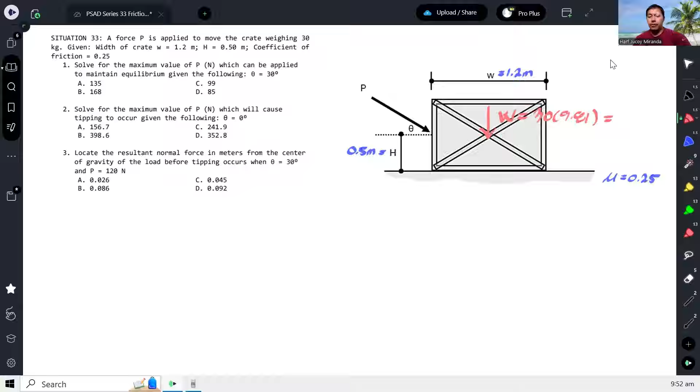Okay, let's draw the free body diagram here. Of course, there's the weight, which is equal to 30 kilograms times 9.81, and if you calculate that, it gives us 294.3 Newtons. The impending motion is expected when it slides to the right, that means the friction will act to the left. And then we have our normal force. That's it.

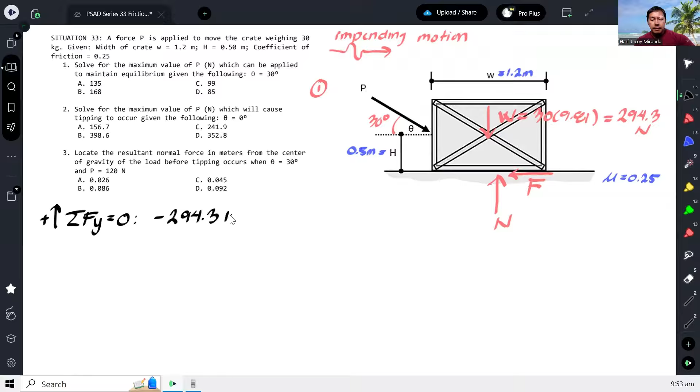For the first problem, number one, theta is 30 degrees, so we just need to find P. To solve for P, we apply the equilibrium equation: summation of forces Y equals 0, assuming upward positive. We have 294.3 Newtons downward plus the normal reaction upward, and this P has a Y component which is downward, so P sine of 30 degrees equals 0. From here, we can solve for N, which is P sine 30 plus 294.3.

Then we take summation of forces X, assuming to the right positive. We have the X component of P which is P cosine 30, and then we have the friction force, minus F, all equal to 0.

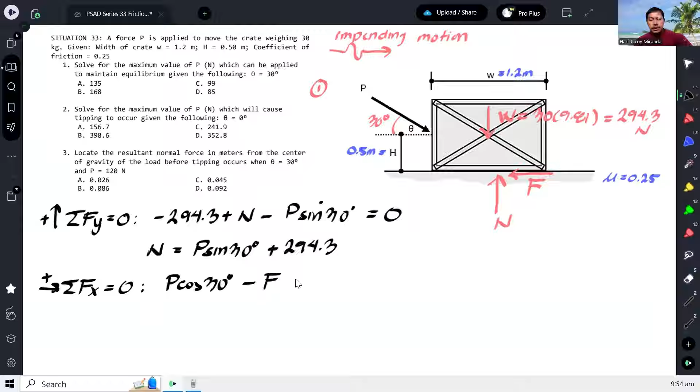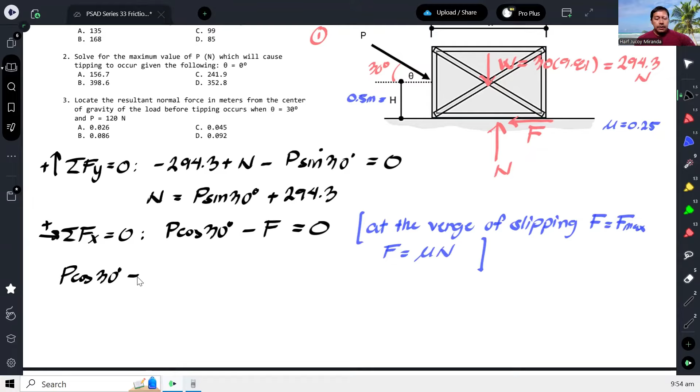Of course, at the verge of slipping, our friction force will equal the maximum friction force, which is mu times N. So we set that as mu times N. This means P cosine 30 minus mu, which is 0.25 times N, is equal to 0. However, N is equal to P sine 30 plus 294.3, so we can substitute that.

And from here, we can solve for P, which gives us around 99.3 Newtons. So this is now the maximum value of P to keep the crate from sliding. The reason it's about sliding is because summation of forces X equals 0 was our criteria. So that's the maximum value of P to keep the crate from sliding.

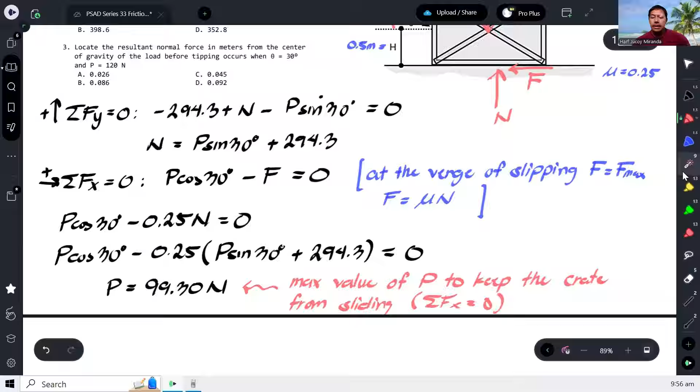Actually, in the problem statement, it only says to maintain equilibrium. It didn't specifically say to keep it from sliding, meaning to avoid sliding. So when it's equilibrium with this setup, it's not only sliding that can happen as instability - there's also a tendency that when you push it, it can topple, it can overturn. So the criteria for overturning or tipping, summation of moment should equal 0.

But summation of moment about where? As you can see, when it topples, our pivot will be at this point, so this is now our point of rotation. Let's call that point O. So summation of moment at point O must be 0, and let's see what the maximum value of P would be to avoid tipping.

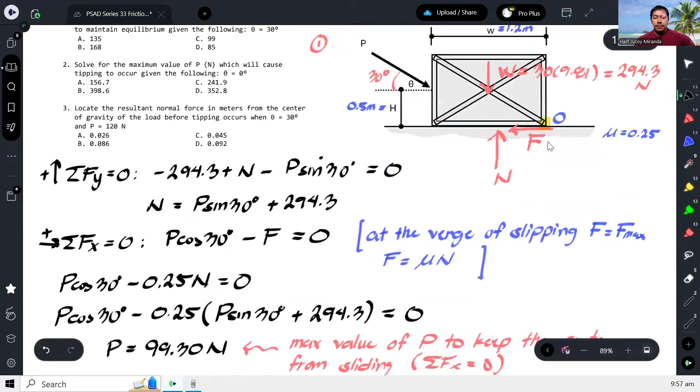So let's take moment about O. This has a horizontal component, P cosine theta, assuming counterclockwise is positive. The moment arm of P cosine theta about O is 0.5, and its rotation about O for the horizontal component will be clockwise, so negative.

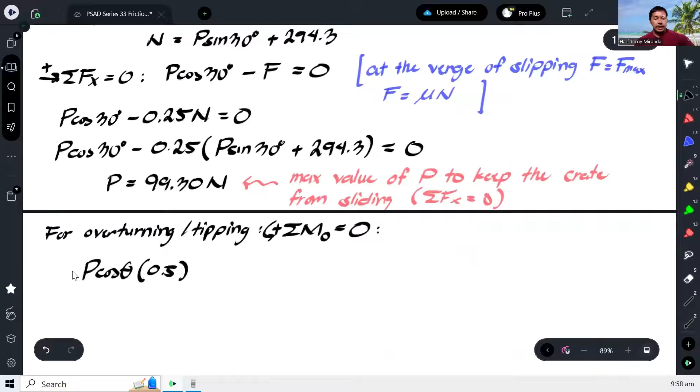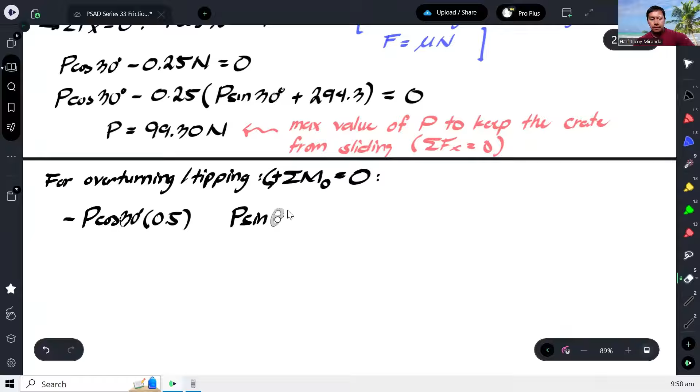The vertical component, which is downward, is P sine theta - and theta for this item is 30 degrees, so let me add that in. The moment arm for this is 1.2, and its rotation would be counterclockwise, so positive.

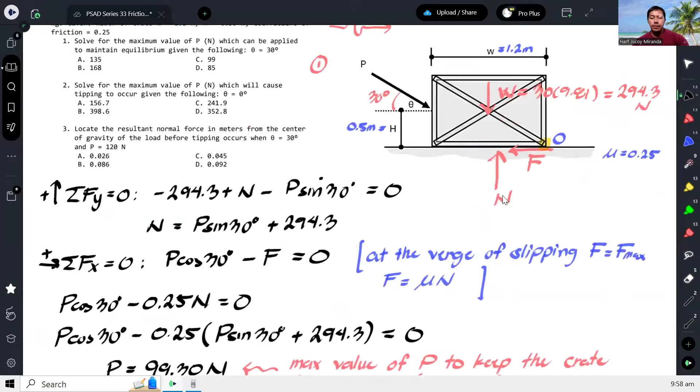Then there's W, which is downward, and its rotation is also counterclockwise, so plus W, which is 294.3. Since W should act on the centroid of the box or crate, its moment arm should be half of 1.2, or 0.6. Now, what about the normal force and the frictional force?

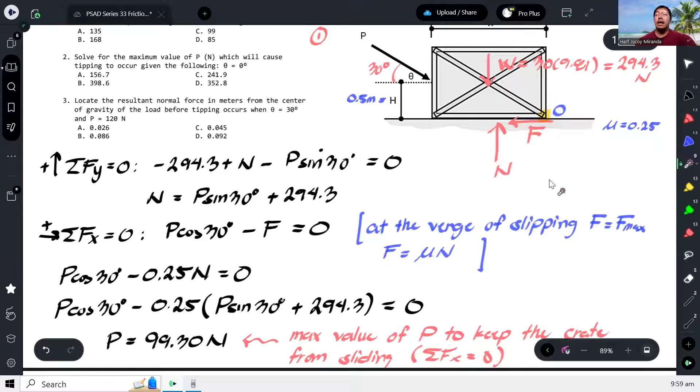Yung frictional force, dadaan naman siya dun sa mismong point O, kaya wala na tong moment. For normal force, baka ang maging misconception niya dito is yung normal force nag-act dun sa centroid. Hindi, no? Kapag friction, hindi naman necessarily na yung N ay nag-act dun sa centroid. Actually, itong N na to pwedeng mag-move depending on the scenario. For our scenario, we are considering that it is at the verge of tipping.

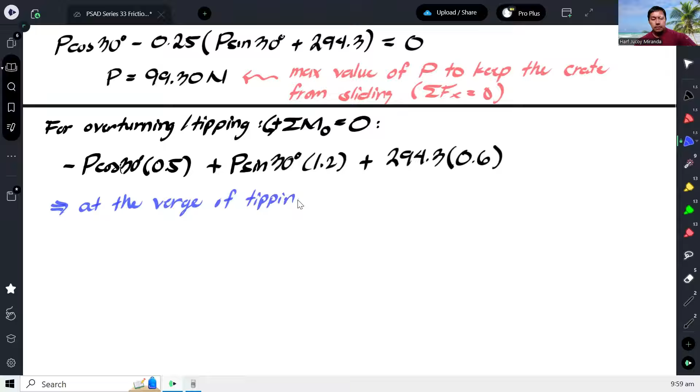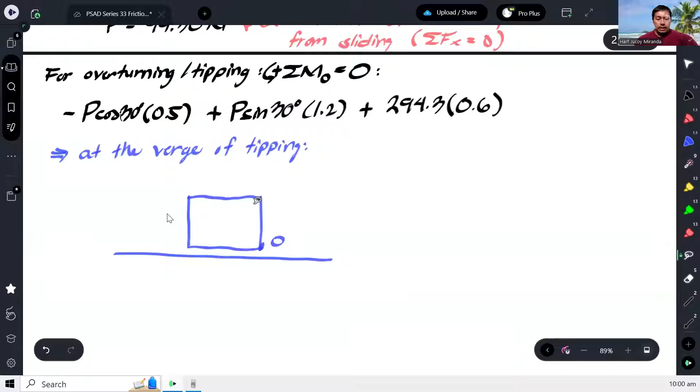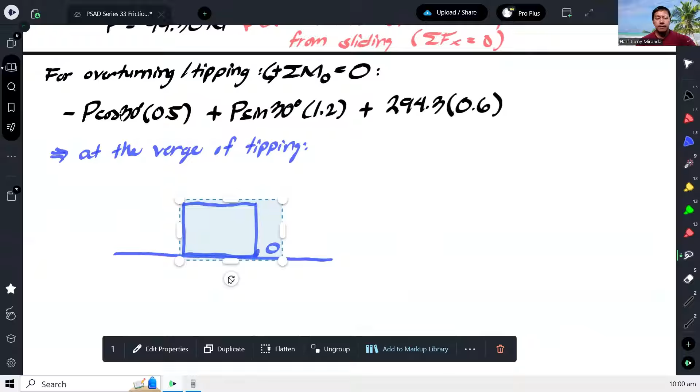Okay, so yung box natin, ito yun eh. Ito yung point O, tapos ito kunwari yung ground. Okay, so at the verge of tipping, ang nangyayari ganito. So, originally, nakapatong talaga siya dito, di ba? Kaya lang, at the verge of tipping, syempre, parang tutumban na to. I-exaggerate ko lang. At the verge of tipping, kaganto na siya.

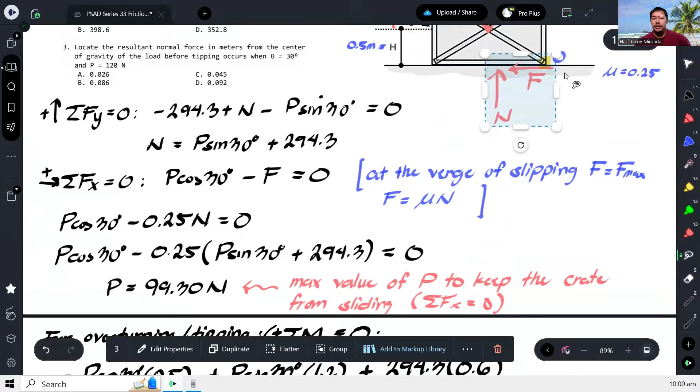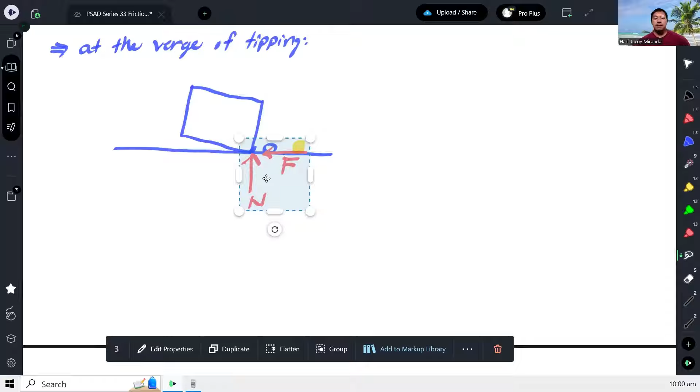Exaggerated yan, ha? Gaganyan na siya. So, ano mangyayari? Yung normal force na dating nasa ilalim, tsaka yung frictional force na dating nandito, lilipat dito. Kasi yan na yung parang huling contact between the ground and the box kapag at the verge of tipping. And what does it mean? Ito, kapag isusulat natin yung moment equation at the verge of tipping, yung normal force nandun na din sa point O.

At dahil nandun na rin sa point O, wala na ring moment na ipoproduce yung N. Kaya parang nangyayari, ito yung W, ito yung P. Kaya yun lang yung mga merong moment, yung vertical components, yung W, vertical and horizontal component ng P, yun lang, wala nang N tsaka F at the verge of tipping. Ibig sabihin, ito na mismo yung equation natin.

And from here, let's solve for P, tingnan natin kung anong lalabas. So, negative P cosine 30 times 0.5 plus P sine 30 times 1.2 plus 294.3 times 0.6 equals 0. Solving for P, it gives us negative 1057.45.

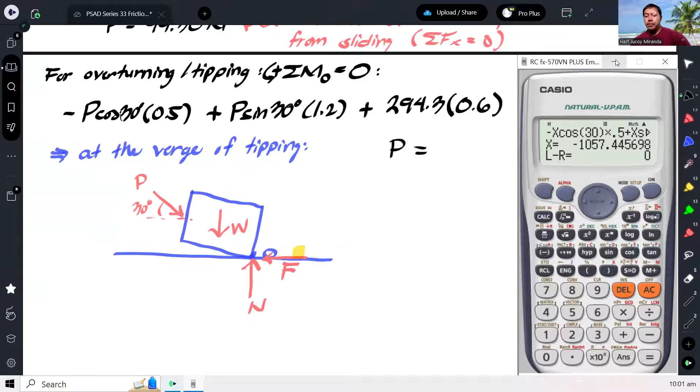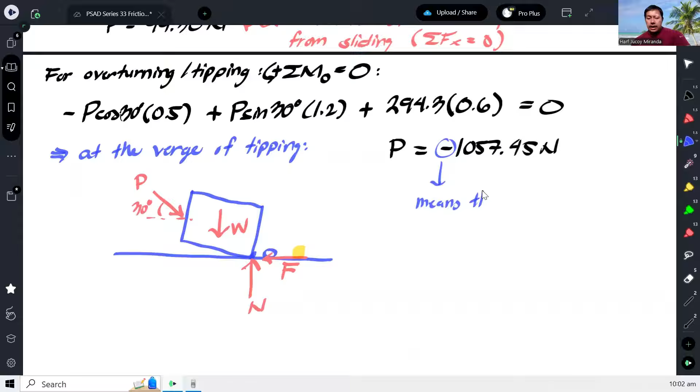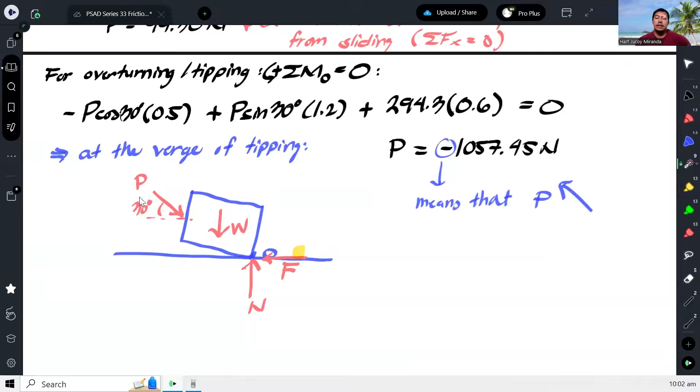So as you can see, the negative sign here means that P should be pointing in this direction. Baliktad. Kung gusto niya, kumbaga, para for the tipping to occur, the direction of P should be baliktad, should be on the other direction. Tapos, ibig sabihin, we cannot consider this as one of our answers because as you can see, it suggests na kailangan baliktarin mo yung direction ng force, pero yung direction ng force ay definite na ganito ang given. Kaya ibig sabihin, hindi mag-govern itong overturning or tipping.

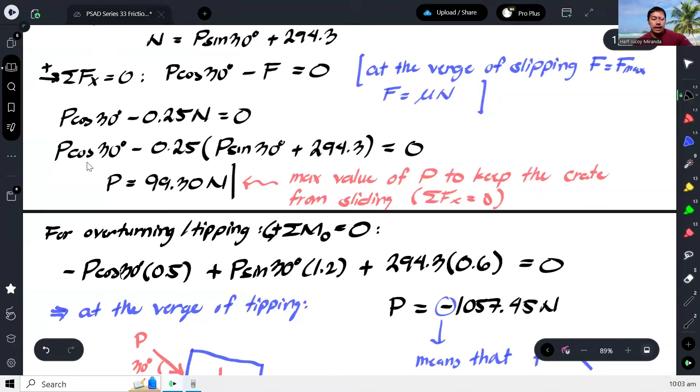So, kung mamimili tayo between this and this, ang pipiliin natin actually is yung mas maliit. Kasi mas maliit means mas critical na force. Or in other words, yun yung mauunang mangyayari kapag mas maliit yung force na kailangan mong i-apply. Kasi pag mas maliit lang, yun yung physically na magaganap once you apply that particular smaller force. So in this particular problem, we can now neglect this as our solution. Therefore, the only correct answer would be 99.3 newtons. Hence, our answer here for number 1 should be letter C.

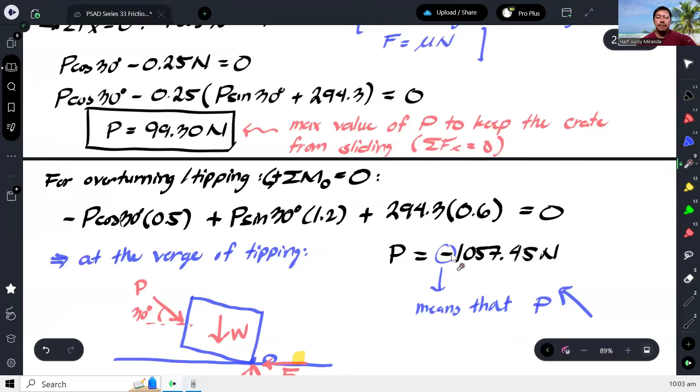Pero in case meron kayo na-compute dito na mas maliit, kunwari na-compute nyo ay, let's say, for example, 88. So, i-compare nyo yung 99 tsaka 88. Dahil 88 kunwari lumabas dito, ang mag-govern naman kapag ganun is yung overturning. Kasi unang mangyayari yung overturn, kasi sa mas maliit na force, mangyayari na siya. Kaya dito nga lang, pinagkaiba kasi nag-negative to. So, hindi na natin to i-consider. Okay, so ito na kagad yung sagot.

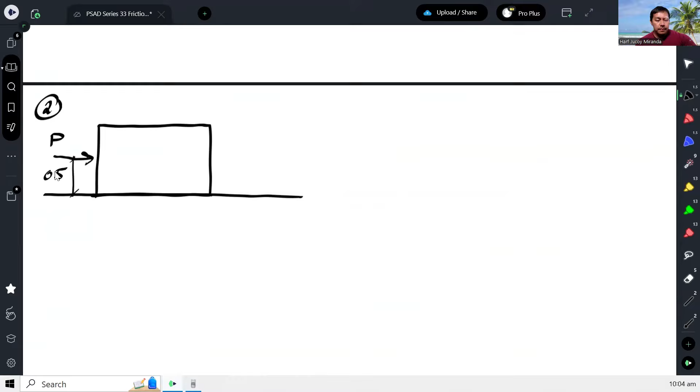All right, for number 2, solve for the maximum value of P which will cause tipping to occur when given the following: theta is 0. So, for number 2, drawing natin. Number 2, ito yung crate. Tapos yung P natin, horizontal na kasi theta is 0 eh. Then W, that's 294.3.

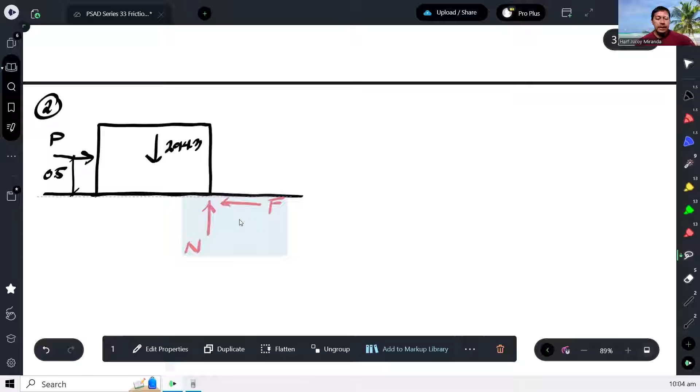Okay, tapos ano pa? And then, originally, meron ditong normal tsaka friction, which is ang discussion natin kanina, at the verge of tipping, nandito yan, nasa point O. Kasi sa number 2, tinatanong specifically ano yung P para magkaroon ng tipping. Ibig sabihin, sa number 2, ang criteria lang natin, summation ng moment about O is equal to 0.

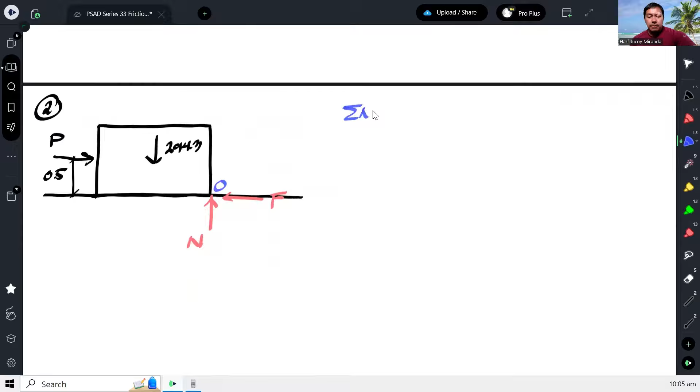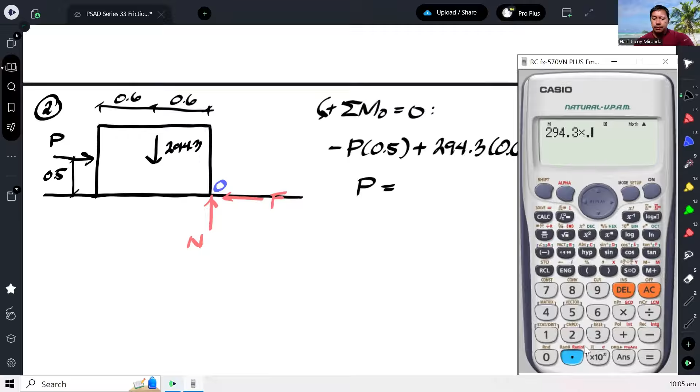Assuming counterclockwise positive, we will have P times 0.5, that will give us clockwise rotation. And then 294.3, tapos di ba kanina, 1.2. So yung distance na to will just be 0.6, times 0.6, and then the rotation will be counterclockwise. And that's it, all equal to 0. We can solve for P. So we have 294.3 times 0.6 over 0.5. So that gives us 353.16 newtons.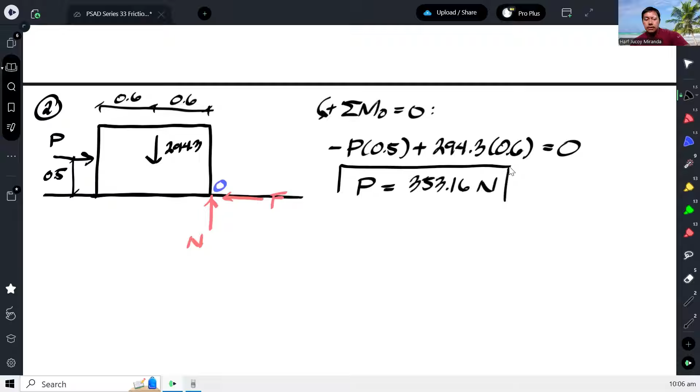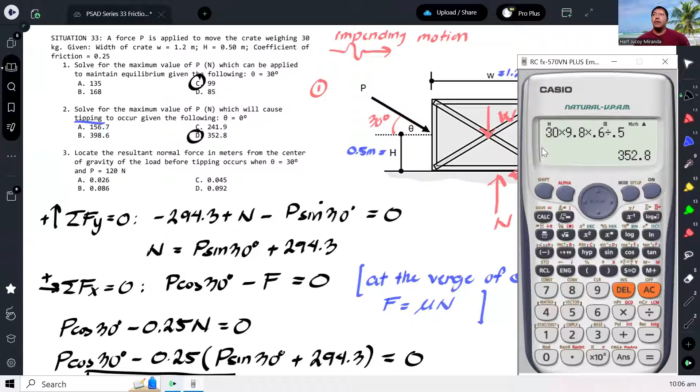Okay, so if you look at the choices, may konting discrepancy kasi yung pinanggalingan nito na reference, ang ginamit na acceleration due to gravity ay hindi 9.81, kasi tayo 9.81 ginamit ko. Kaya ito yung sagot natin. So kapag ginawa mo 9.8, may konting discrepancy lang, naging 352.8. So but again, acceptable naman yan, 9.8 or 9.81, magkakaroon lang ng konting discrepancy. So that's why our answer here is 352.8.

For number 3, locate the resultant normal force in meters from the center of gravity of the load before tipping occurs, when theta is 30 degrees and the applied P is 120. So for number 3, kuha lang ako ng isa pang figure.

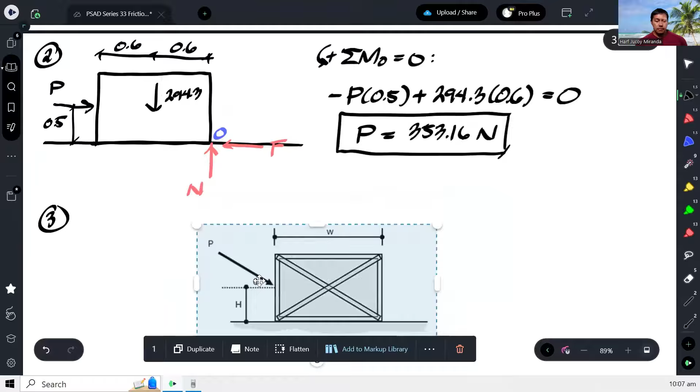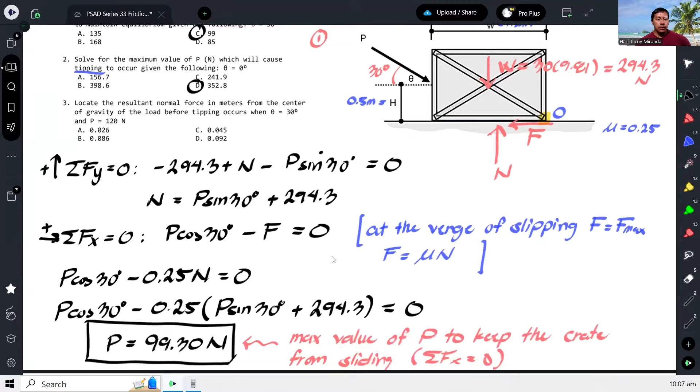Okay, for number 3, pinapahanap yung location ng normal force. Kung ang P daw ay 120. This is 120, tapos this is 30 degrees. Tapos ano pa, may weight, 294.3. Okay, so ang location ng weight, 0.6 tas 0.6.

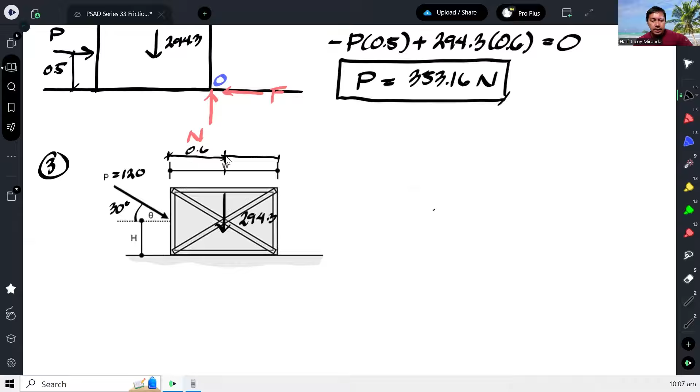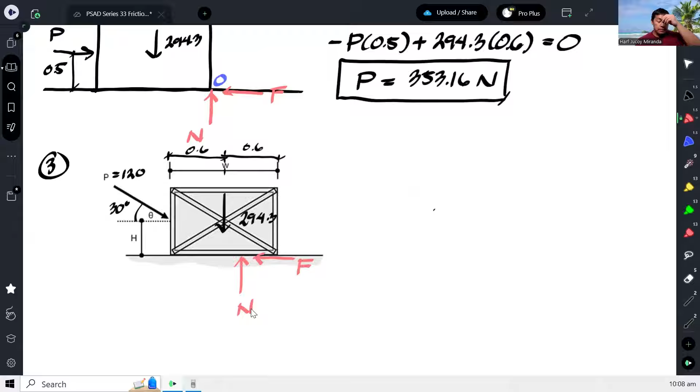Ano pa? I-assume natin na nandito yung normal force, nandito yung frictional force. Tapos ang pinapahanap niya, location ng normal force, from the center of gravity. So ang center of gravity natin ay ito. Hanapin natin ito, tawagin ko na lang na E.

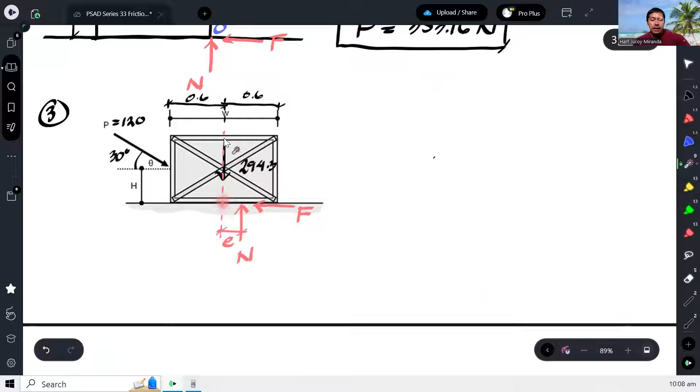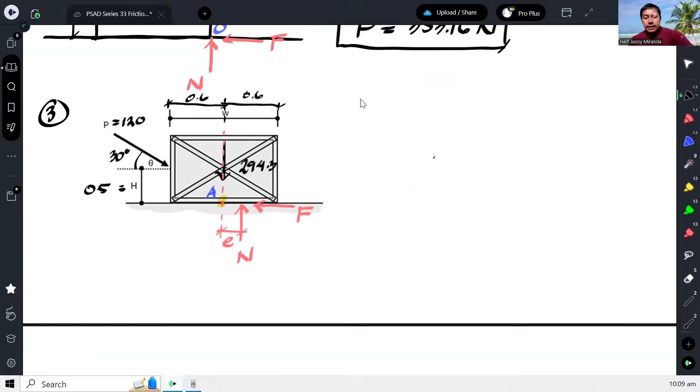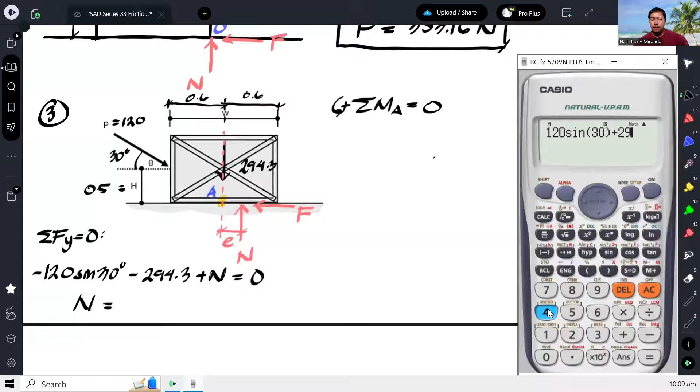Okay, so let's take summation of moment about A is equal to 0, assuming counterclockwise positive. O nga pala, P is 120. So kailangan ko din pala munang malaman dito yung value ng normal force. Para malaman natin yung value ng normal force, ito na lang, very quickly, summation ng forces Y is equal to 0. We have downward 120 sine 30 na downward, tapos downward din yung 294.3, tapos upward yung N. So N would be equal to 354.3 newtons.

Okay, tapos ayan na, so mag-moment tayo sa A. Yung x component nito will rotate, that is 120 cosine of 30, ang moment arm is 0.5 and the rotation is clockwise. Tapos yung y component naman ng P, that is 120 sine 30, ang moment arm ay 0.6, ito from point A, so ang rotation niya naman is counterclockwise. And then walang moment yung weight, tas yung moment ng N.

So ang N, ang moment arm niya ay E. Okay, pero yung N, lagyan na natin ng value, that is 354.3 times E. Tas ang moment, ang rotation ng N based on our assumption is counterclockwise, so positive. Okay, and then yun lang, wala na kasi yung F, hindi naman naiikot. So all equal to 0. O nga pala, bago ako mag-proceed, etong N na to, inassume ko lang na nasa bandang kanan nung centroid.

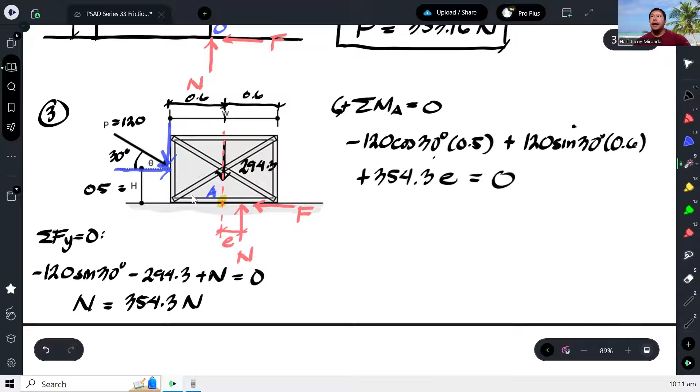Pero it can also be possible na yung N na yun ay nandito sa bandang kaliwa. At doon, para malaman mo kung alin yung tama, basically kung ang lumabas dito na sagot natin ay positive, ibig sabihin tama na yung N nandito sa right side. Pero kung ito ay mag-negative, ibig sabihin lang yung N natin ay nasa bandang kaliwa. Yun lang yun, ibig sabihin lang mali yung assumption natin.

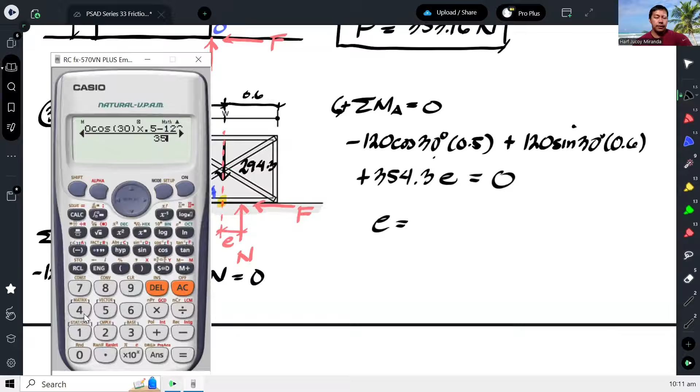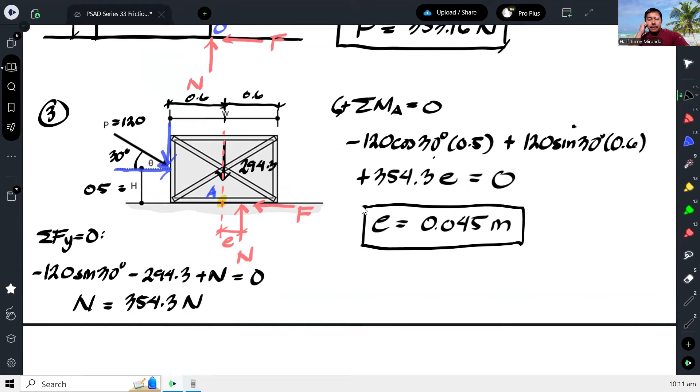Anyway, solving for E, we have, pag transpose natin sa kabilang side, magpapalit ng sign, yun yung ginawa ko sa utak. Tapos divided by 354.3, ayan, so 0.045. And positive naman, so ibig sabihin tama lang na nasa right side siya. Okay, so our answer for the last question is 0.045. Okay, and that's how we solve this particular problem.